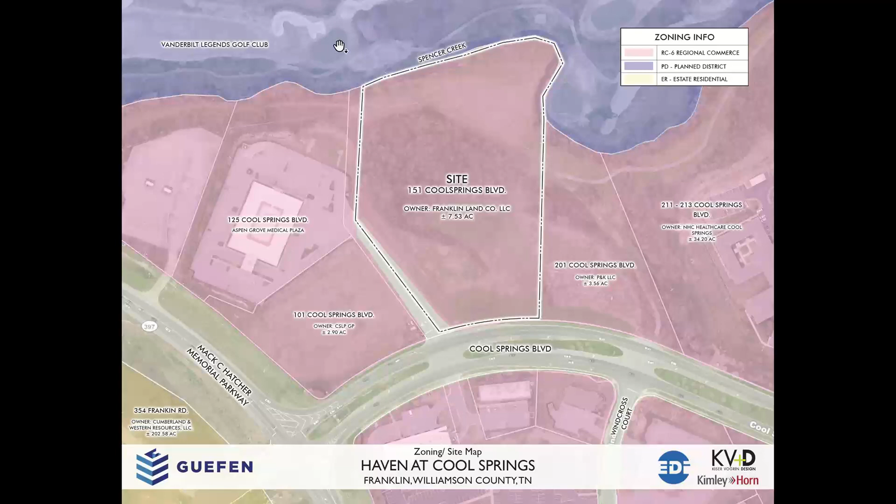Tonight, the intent of the rezoning is to rezone the current site to PD Planned District, shown here in purple. As part of this project and in joint efforts with the city and adjacent property owners, we will have access points into the site from Cool Springs Boulevard as a right-in, right-out only, and also direct access from our site, 151 Cool Springs, through 201 Cool Springs Boulevard to access the light directly across from Windcross Court. This new intersection will provide safety and access to all 4 parcels in this development.

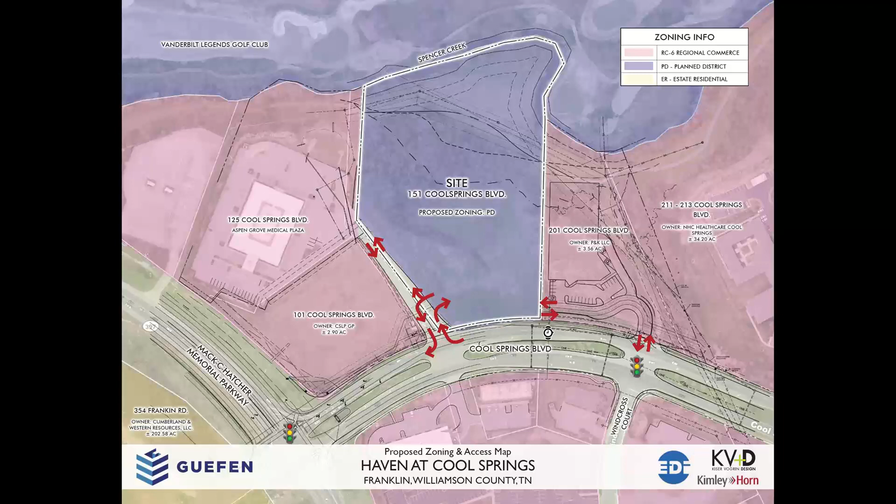We have 201, 151, 101, and 125, the medical office that we're referring to. This is the overall master plan.

The Haven at Cool Springs development proposes a single 6-story mixed-use building, including 297 residential dwelling units. The ground floor fronting Cool Springs Boulevard includes approximately 9,200 square feet of commercial space. 5 live-work units with individual pedestrian access to each of those units are included within this development, along with 3 levels of parking below the building footprint to provide direct residential access to each floor.

The parking is screened from view from Cool Springs Boulevard and contributes to solving the naturally occurring 50-foot grade change across the site. A majority of the residential units are sited to take advantage of the views to Spencer Creek, the Vanderbilt Legends Golf Course, and Roper's Knob.

Also included are two sizable amenity areas for residents that will include a swimming facility and landscape amenities. The site also includes a great deal of floodplain and floodway to the north, or the rear, of our site. The building and parking are intended to be built entirely outside of these areas, with minimal, if any, impacts to the existing conditions of tree canopy and Spencer Creek located to the north.

In coordination with Franklin Planning staff and the Parks Department, we are proposing to continue the extension of the Greenway Trail that currently leads to Aspen Grove Park to our east. The bold red line distinguishes on-site improvements, while the red dashed line represents off-site improvements that we intend to work with the adjacent property owner to tie into the existing trail shown in purple. The existing sidewalks along Cool Springs Boulevard will remain.

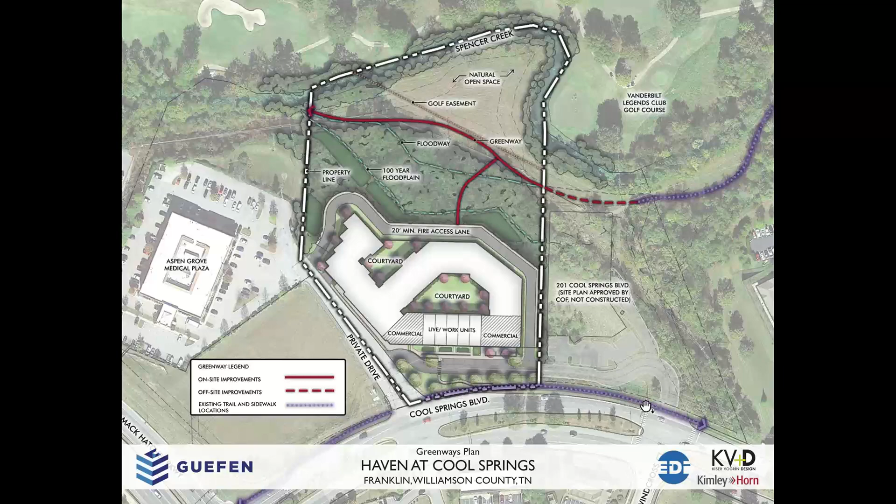The design team has met with planning staff and the fire marshal to discuss fire access around this building. A drive aisle designed along the perimeter of the building shall act as the fire access, providing 360 degrees of access to the building. That is shown here.

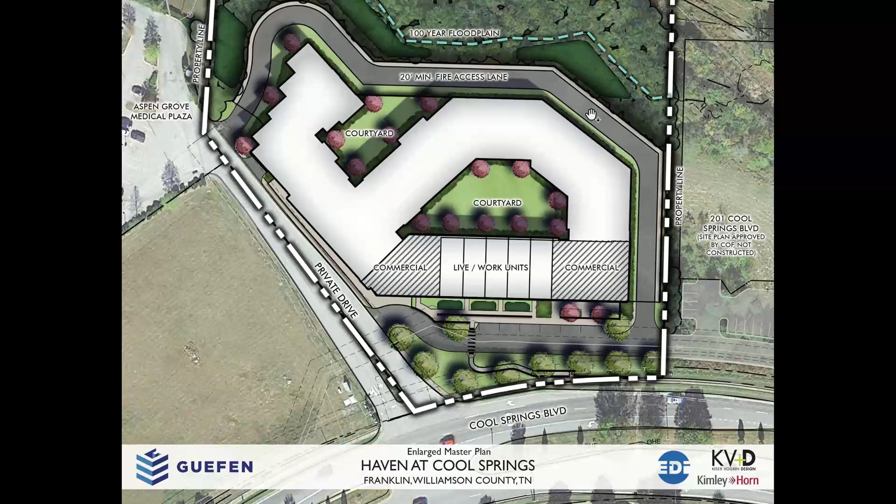I'll now share a few of the architectural massing studies of the proposed site, followed by a short animated video of the project. These massing studies were included within our pre-application submittal to the city.

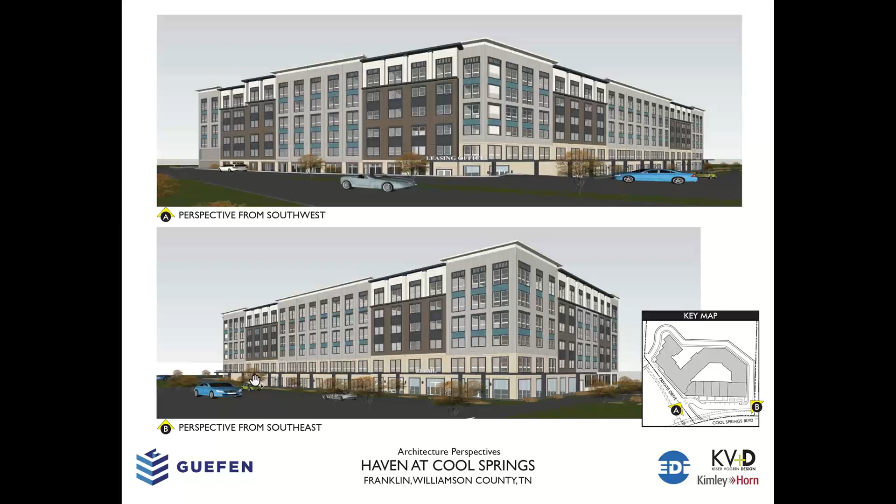Perspective B is from the southeast, or the new drive accessing 201 Cool Springs Boulevard. Here we have retail at the corner. We would have our live-work units at grade, here where my hand is, and then in the far corner it brings you back to the leasing office.

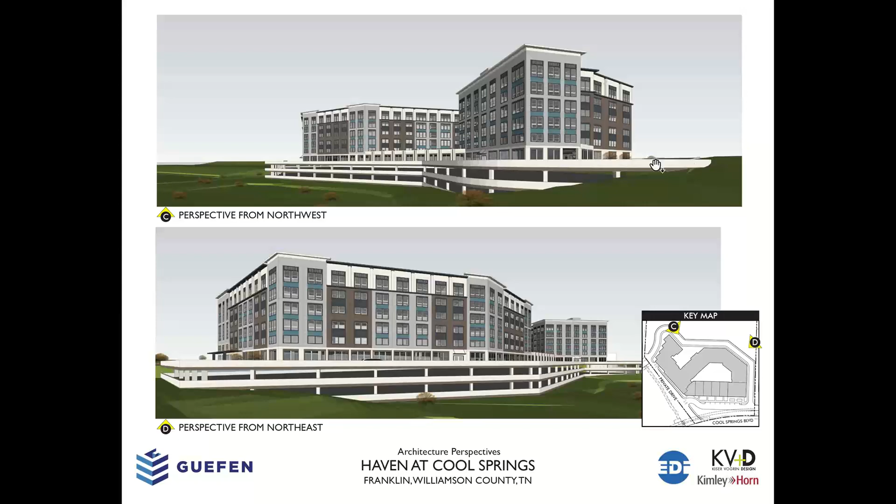Here are views from the rear of the site. This shows how we layered the building with three layers of below-grade parking. You have your bottom layer, second layer, and third layer here at grade. This is also your fire access lane around the perimeter.

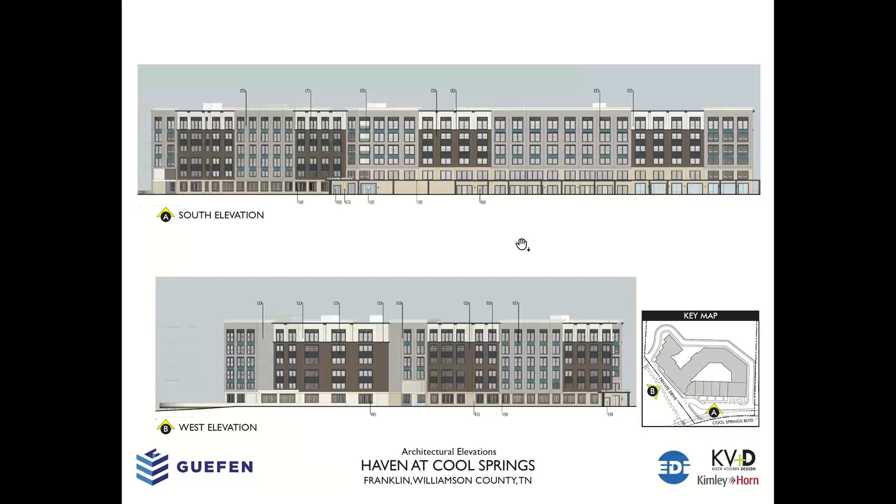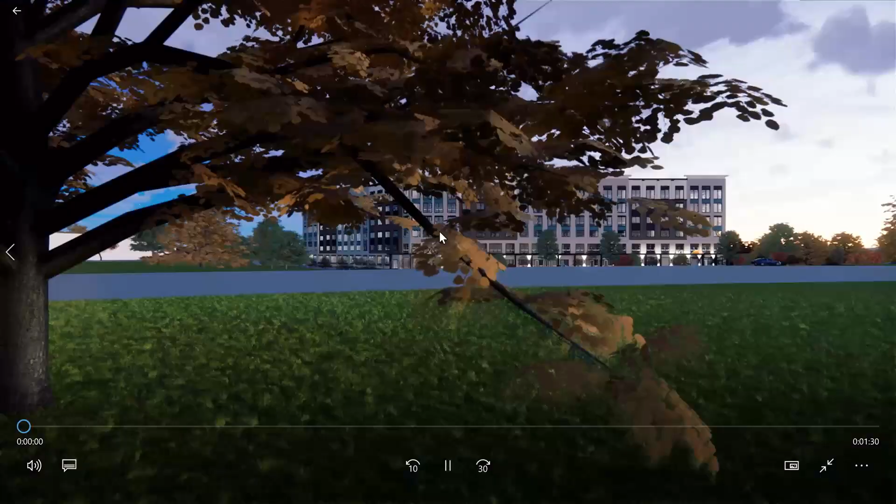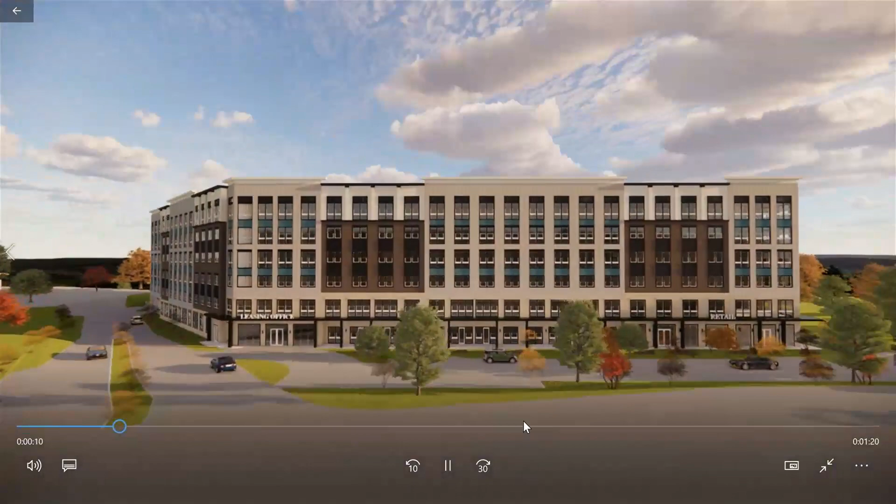Now we'll share a flyover prepared by EDI International, our architecture team, of the proposed development. This is as seen from Cool Springs Boulevard. There will be about, I believe, ten feet of grade change from Cool Springs to the front of the building.

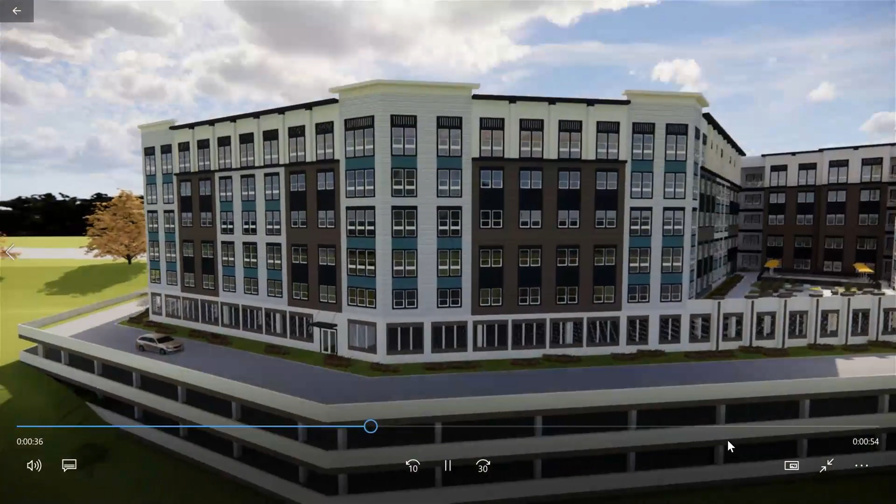This is our fire access lane. Bringing it around to the rear, you can see the three levels of parking. Here would be a proposed pool amenity courtyard, and there would be another courtyard amenity interior to the building.

You would access the MOB, or medical office building, from this drive here, and the access to the parking garage is located here. This then brings us back to Cool Springs Boulevard, where you can see the leasing office, the live-work units, and proposed commercial or retail space. Then here we go into a night view of those proposed amenities.

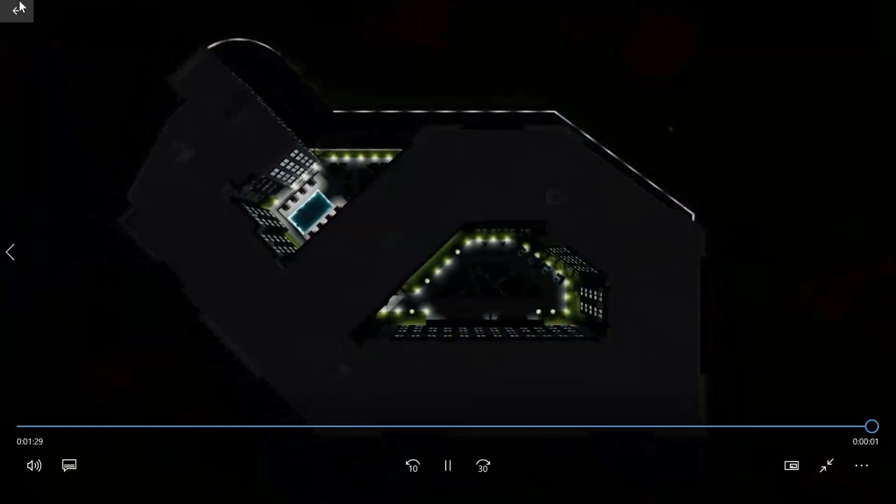That concludes our presentation. Thank you for your time this evening, and we'll now answer any chat questions as part of the Q&A.

And Joey, let us know if there's any questions you have or how long you'd like us to hang out for.